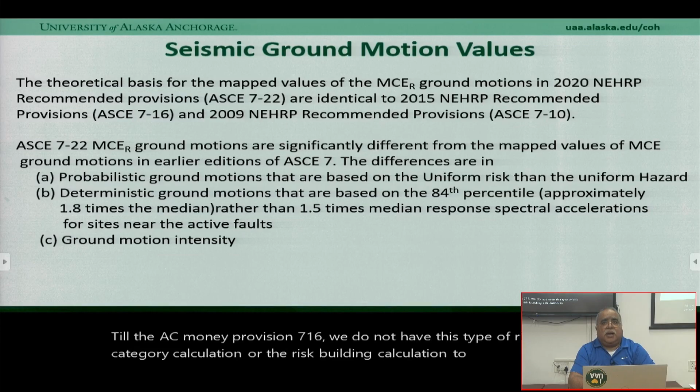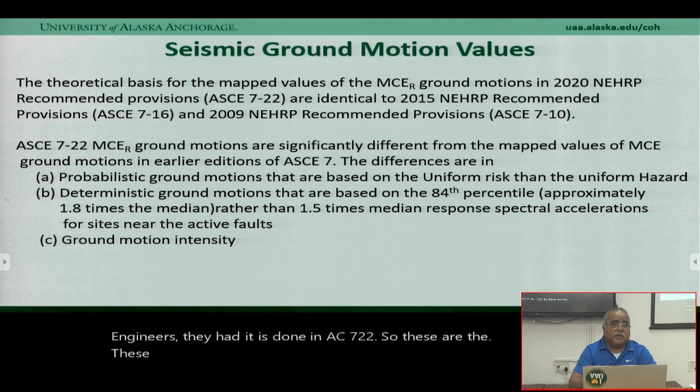So till 2000, till ASCE provision 7-16, we did not have this type of risk category calculation or risk building calculation incorporated. But in the recent change of the American Society of Civil Engineers, it is done in ASCE 7-22. So this risk factor has basically been introduced, and as a result, changes are being made in how to calculate the design.

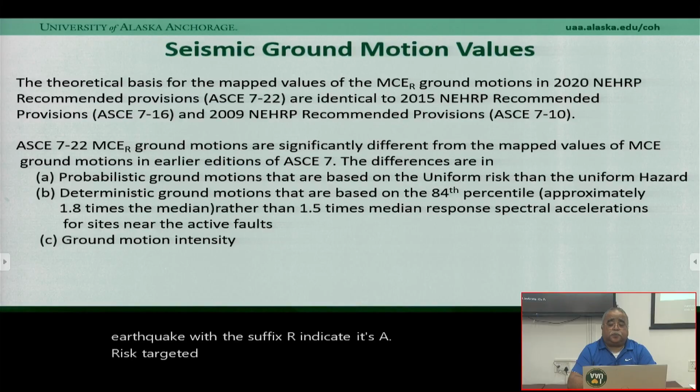So now we are giving a category which is called ASCE 7-22 MCE-R. This is your risk-targeted maximum considered earthquake. MCE is maximum considered earthquake, with the suffix R indicating it's a risk-targeted mapping. Earlier we did not have this, but currently it has been introduced.

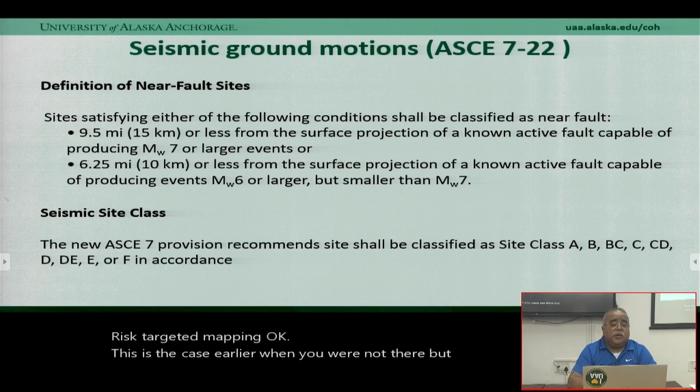Let me go to this. As I mentioned last time, when Professor Agarwal was showing all the site classes, the earlier site classes were A, B, C, D, and E. Now ASCE 7-22 has recognized a few other seismic site classes.

So basically, hard rock is now site class A, having a velocity greater than 1500 meters per second -- that means the VS30, or the average 30 meter shear wave velocity, is greater than 1500 meters per second. Then there is medium hard rock, geologically called medium hard rock, which is 900 to 1500 meters per second. That's site class B.

Then we call it the BC boundary, or BC site class. The BC site class is basically between 640 meters per second to 900 meters per second. That's the BC category.

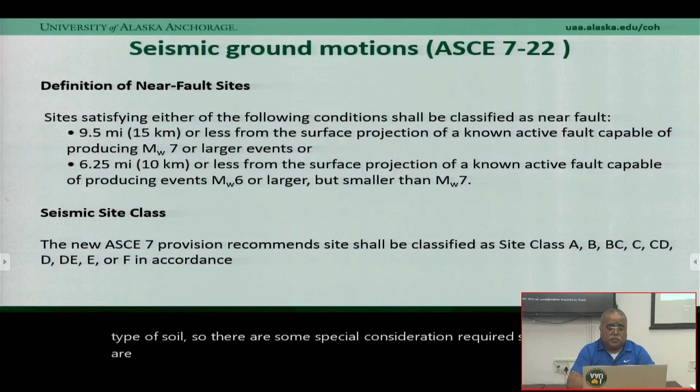So these are the soil types, whatever the current rules are. So now the seismic site classes are not just A, B, C, D, E.

It is all A, B, BC, C, CD, D, DE, E, and F, right? So these are the site class categories nowadays, and mostly the code will go up to D and E. For E, if that type of soil is encountered, meaning the average 30 meter shear velocity is less than 150 meters per second, they need to recommend putting the design very carefully. So for E and F, we have to be careful, but for the rest, we have some design criteria we can use for the seismic design part.

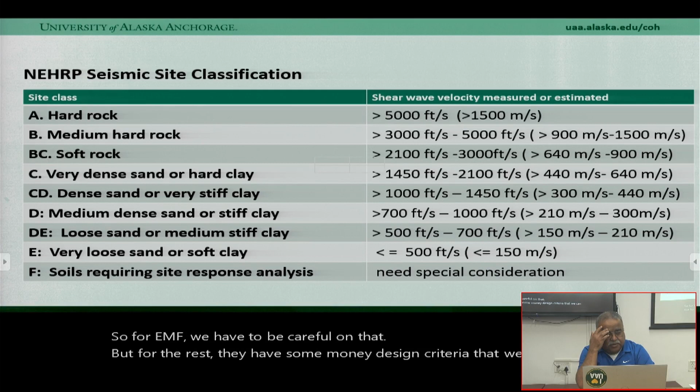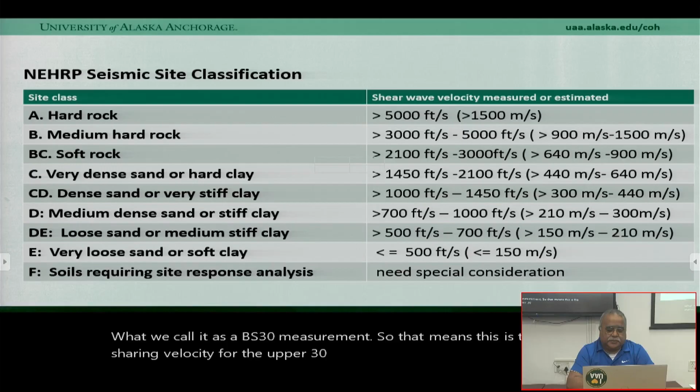Okay, now this is all what we call the VS30 measurement. That means this is the shear wave velocity for the upper 30-meter shear wave velocity.

Average shear wave velocity, what we call VS30, is basically the summation of DI divided by summation of DI by VSI. So if you have soil, and we are just trying to calculate 30 meters, let us assume there are a few soil layers. We add up the individual soil layers, and if it is 30 meters, we go only up to 30 meters. So the summation of DI will equal 30 meters, and then divided by individual layer thickness divided by its velocity, and goes up to 30 meters.

If the 30 meter mark falls within one boundary, we have to take that much of thickness which covers the 30 meters. After that, we should not take more. So that is your average 30 meter shear wave velocity. But does it make sense to you guys? If not, let me explain it a little bit.

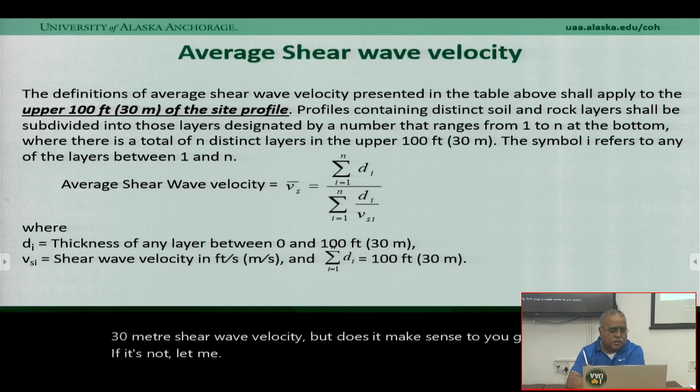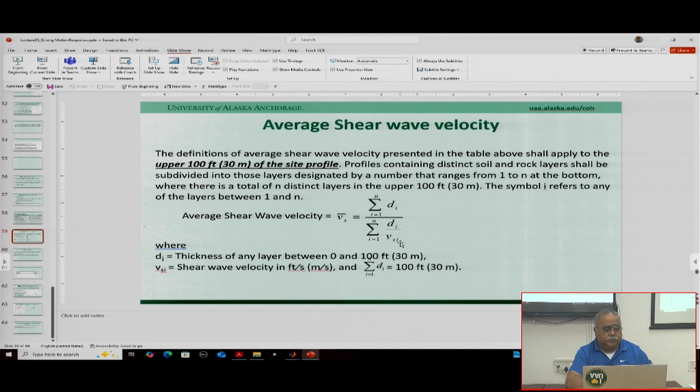Summation of DI by VSI - why are we taking that? Because this is velocity, and velocity means distance over time, so this is the time factor. Time means D by V. Because this is the total distance D, and this has to have the dimension of time. So D by time has to be the velocity. So if this is your time, then this has to be D by V. I sometimes get confused by this too, but thank you, I have not done it wrong.

VS30 - we only go for 30 meters, 100 feet depth. That's the reason. Other than that, for VS30, we are taking only VS30.

As I told you yesterday, we are talking about VS30 because in California, as I said, the California data mostly influences every part of the world since they have a very good network and a collection of data for a long time. In California, it has been found that building shaking is mostly influenced by the uppermost 30 meters. Now, you can say why not 100 meters - there is apparently no reason, but since it has been found technically that in California the 30 meter shear wave velocity information is critical for the structure, that is why it has been included into the code. If someday it is found that some regions have evidence that 50 meters is a much more controllable factor, then maybe 50 meter shear wave velocity average may be introduced in the code, but till now it is all 30 meters.

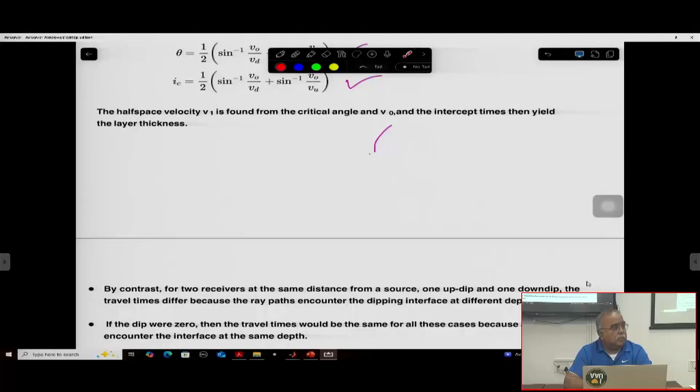Any site, even if it has topography - suppose this is the topographic profile, you have one site here and another site here. I always measure 30 meters from here, so that is 30 meters from this one, and I also measure 30 meters from here. Now whether the mean sea level is here or there, that's a different question.

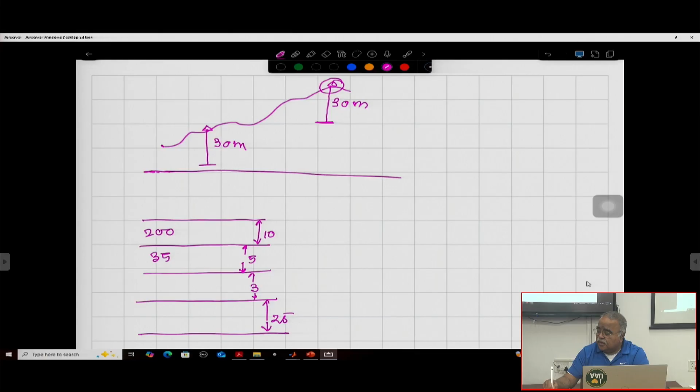Let's say this is 200 meters per second, this is your 350 meters per second, this is your 400 meters per second, and might be this is 600 meters per second. So these are all in meters.

If I try to calculate this value, the average VS30 will be equal to - this will be the 30 meters, that's for sure. So the upper one will be 30 meters, and then this will be d by v, so 10 by 200 plus 5 by 350 plus 3 by 400. This is 10 plus 5 plus 3, so 18.

Now this is 25, so I will not go to the full 25, but I will go to the 12 by 600. Then that will be the average velocity value - you calculate this and put in these numbers.

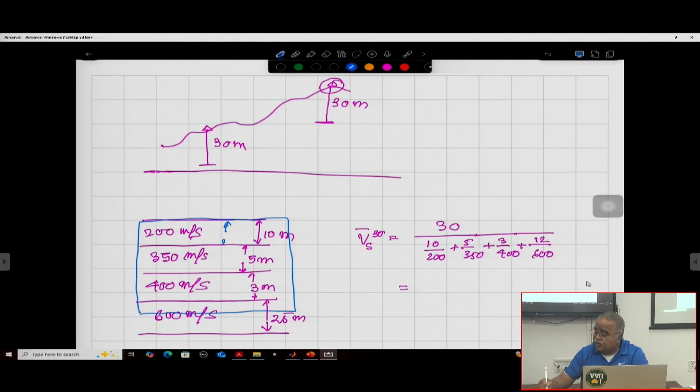That means we will be taking only up to the 12 meters from here, so that becomes 30 meters. So 12 plus 3 is 15, 15 plus 5 is 20, 20 plus 10 is 30. So that's how we use it in the VS30 calculation. Make sense?

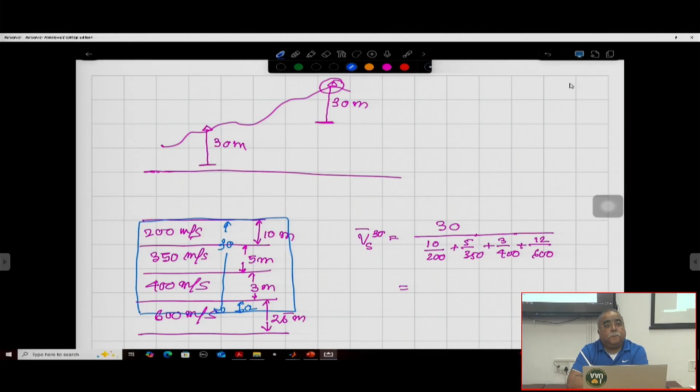Now let me tell you the main things. Earlier we had the MCE level of earthquake. This is before 2022. The design code has two things - one is the MCE level earthquake.

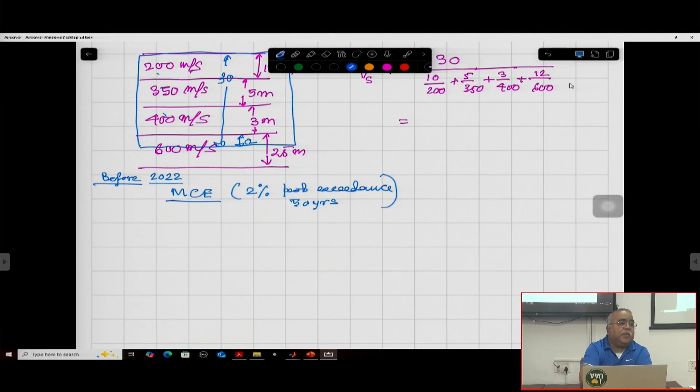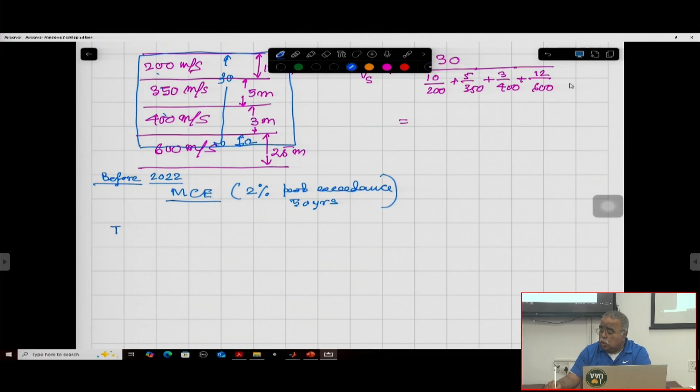Now, each one we were designing based on the two-point formula. We were using it. The two-point means in the map - in the map we were getting a short period spectral acceleration.

Short period spectral acceleration, we call it SS, so that's short period spectral acceleration. And we have another value, spectral acceleration at 1 second period, which equals S1. So these are the two period things.

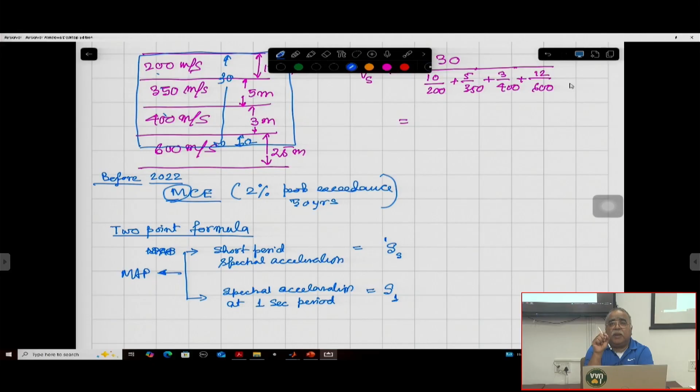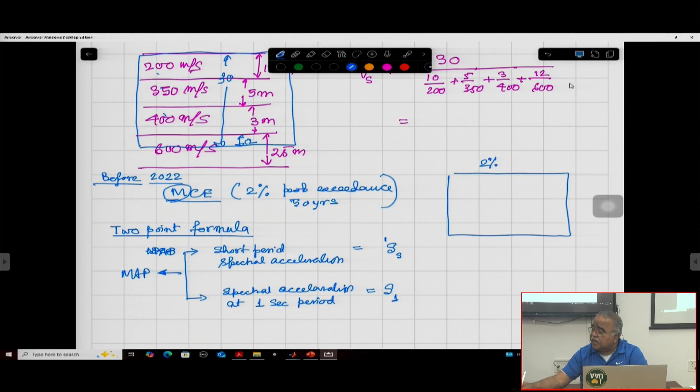Now these two numbers we read from the map, and these values are available from the 2% probability of exceedance in 50 years map. So suppose if you go to a place, you first take the spectral hazard map which specifies 2% probability of exceedance in 50 years.

This map has contour values at some point, and you have a site. So you read the site latitude and longitude. Say suppose this is your site, you read the values of the spectral acceleration map for this longitude and latitude. You can read, say, some numbers like 0.16 and 0.12.

So you can interpolate this and read these values for the short period map, that means at short period values. And also we have the same map available for the 1 second period, and from the contours you again read the contour values for the location where you are interested. That location gives you the S1 value, and this is your SS value.

S is actually the short period, the S means it's at 0.2 second. So there are two controlling points: one is the 1 second and the other is the 0.2 second. Right, so that's the 2 points.

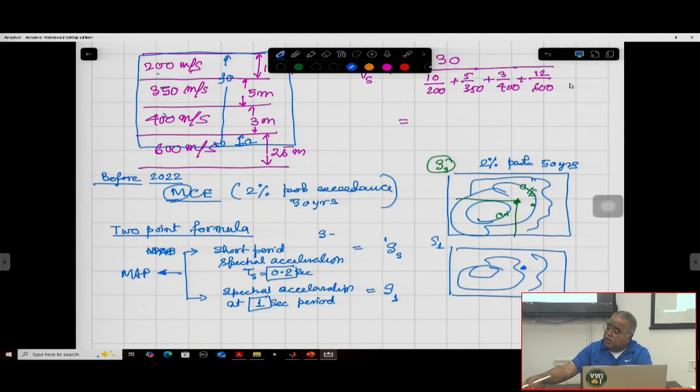Then if you have calculated the site class, now you see these maps are developed earlier, prior to 2022, and they are all given for site class B, because earlier we had only site class B as the rock. So these maps are developed for site class B, but you may have a site where you are trying to calculate the design that may have a site class, say C or D, but that will not reflect in these values, right?

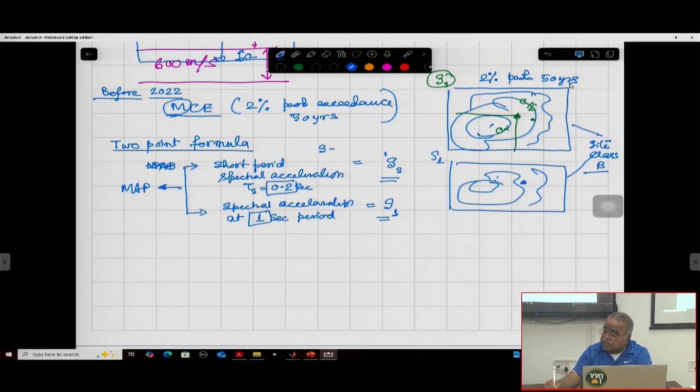So that is not given in that. At the time, only the map is available for the rock site, meaning the bottom of the engineering bedrock, that is site class B. So you have to correct for the site class.

So if you are using the 2% probability map, then SMS equals FA into SS, and SM1 equals FB into S1. So these FA and FB are the correction factors for the site class, which you can use for your maximum considered earthquake. You have a 2% probability of exceedance and calculate these numbers.

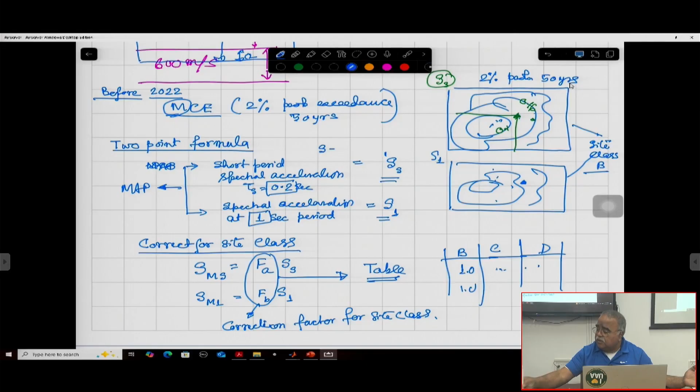So these things are given in the form of a table, the FA and FB values for other types of soil. So for type B soil, FA and FB are both 1.0, because this is actually given for the B soil class. Then C and D have different numbers. So that will be used - your SS value gets multiplied by this number, and that gives you the SMS and SM1 values.

One parameter is Vs. So the values what we are using for CD type, it is already included in Vs.

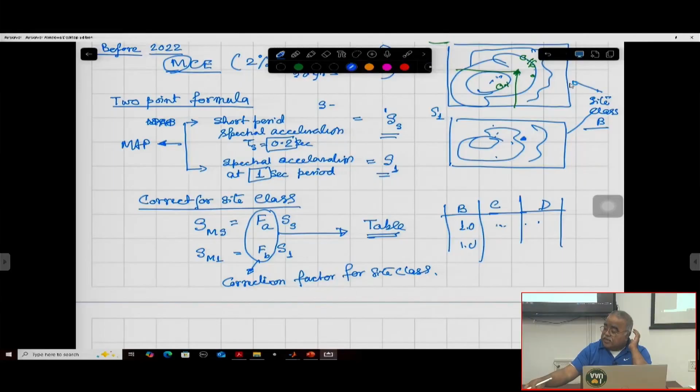When these maps are prepared, you need not think about the ground motion prediction equation. These maps were prepared based on the hazard calculation, so that means this has already taken care of all the hazard values, whatever in that area they like to do.

So whenever they did that calculation of the site response for the hazard, the hazard curve is like this, and there is a 1 second and a 0.2 second type, so this is 0.2 second and this is 1 second part, or might be anything like that. And this side is the rate of exceedance, and this is your rate of exceedance, and these are some numbers. This is the value of G, right?

So what we have done, we will be taking now the 2% probability of exceedance and calculate what will be G. So you have already calculated the 2% probability of exceedance, 0.0004 something, right? That's your probability of exceedance for 50 years, a 2% probability of exceedance in 50 years will be something around this. So you read this value, go through the hazard curve of that area, and then calculate this one.

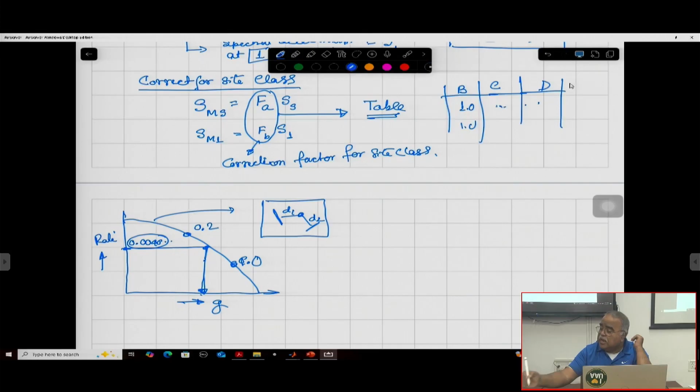And this hazard curve you have generated by seeing that this is your site, this is one fault, this might be another fault, this is your D1 distance, this is your D2 distance, and you have calculated this curve based on that. So if this curve was generated, then you calculate that if this is my rate of exceedance, then at that time what will be the value of G, and that value is basically written here.

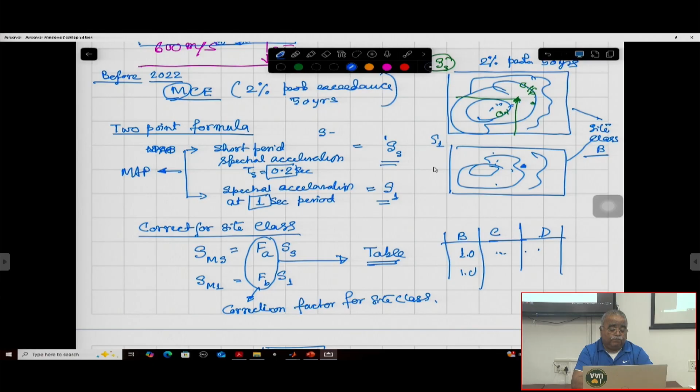Let me see this, there are the numbers. I have to see the numbers quickly.

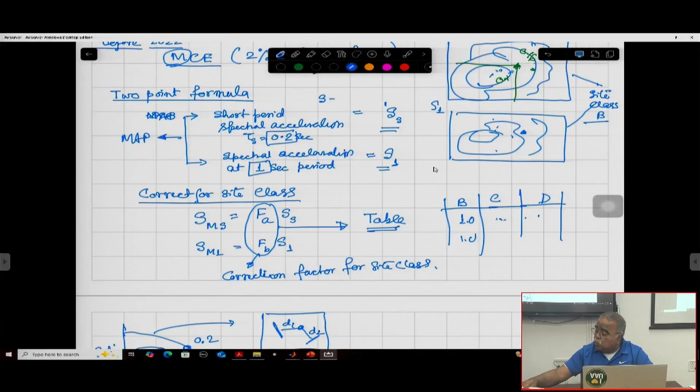After you calculate this SMS and SM1, we also calculate the T0. So this is your T0 values. T0 will be equals to SM1, whatever you have calculated SM1, divided by SMS.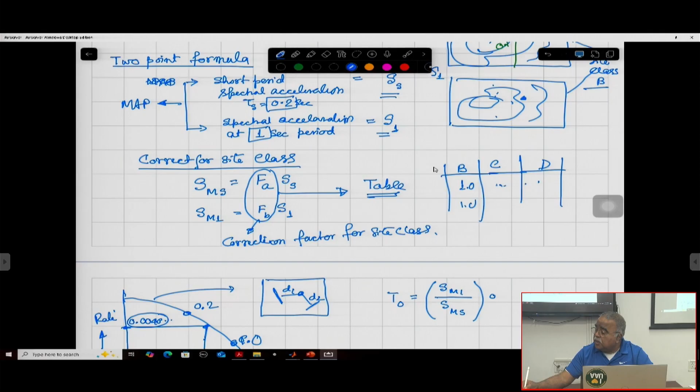So that ratio you calculate, and that will be calculated as this multiplied with 0.2, that will be equals to the T0. And this ratio we call it as TS. So TS into 0.2 will be equals to the T0 values.

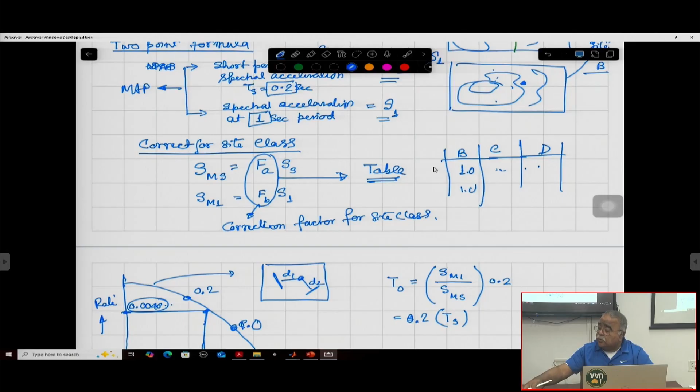So you can calculate with these numbers, right? So you know these values, and then what we will be doing here, we will try to calculate the spectral acceleration, this is the period, time period. So this is the period value and this is the S value, so this is the spectral acceleration at any thing.

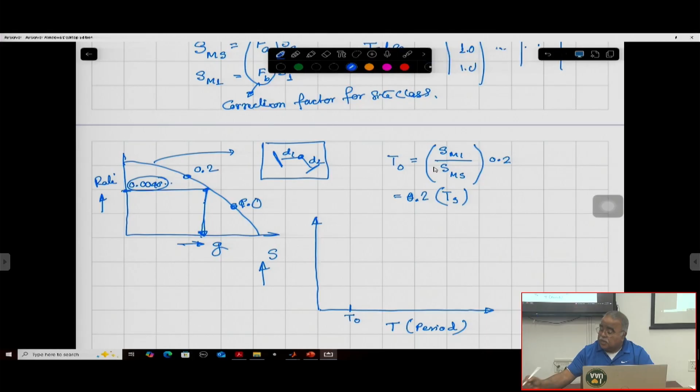So this is T0, and this is what SMS and SM1. So now we have got this T0 value, then we have to get this TS value. So we calculate, this is the TS value, and then we have 1 second, and then we have a TL value, so this is the TL. So these are the three parts that we need to use.

Now this is what I was trying to tell you earlier, that this is your FA and FB. These FA and FB are for different sites. So if your spectral acceleration, sorry, let's go to this side a little bit.

So if your spectral acceleration SS, whatever you read from the map, so you read the SS value from the map, right? And if your SS value from the map is, say, any value which is less than 0.25 G, or might be 0.5, might be 0.75, might be 1.0, might be greater than 1.5, then you also see your site class, because you have seen your site class. So from the site class you know whatever your site class is, it is your A, B, C, D, E. So let's say your site class is C, and you have seen your spectral acceleration SS value, which you read from the map, is say around, or it is say greater than 1.5.

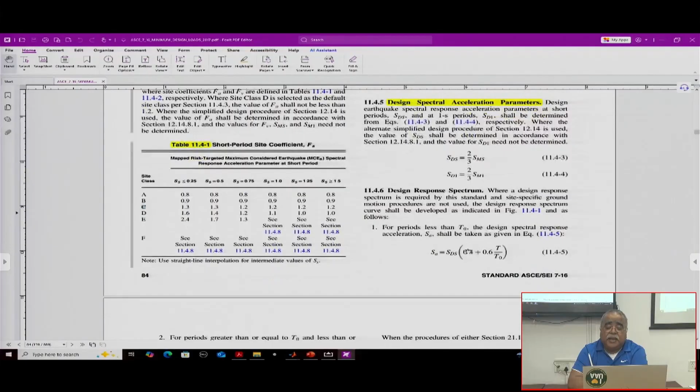Is it clear? So that is how you calculate your SMS. After you do that, you can also calculate SM1, and this one.

Now you take our design spectra, which is called the design level, and this is called SDS, SD1. So this is your MCE spectra, and this is your design spectra. This is what we call design spectra. This is a little bit less than your SMS and SM1.

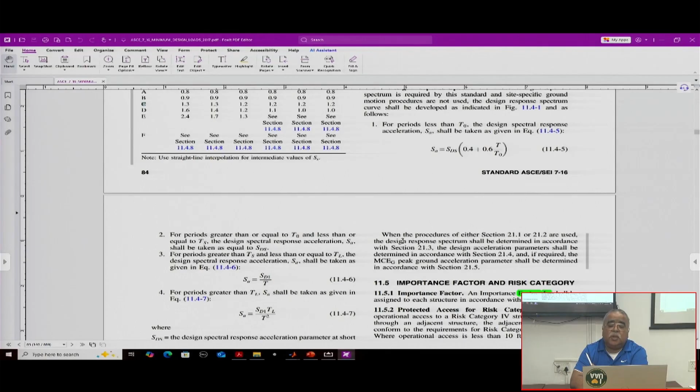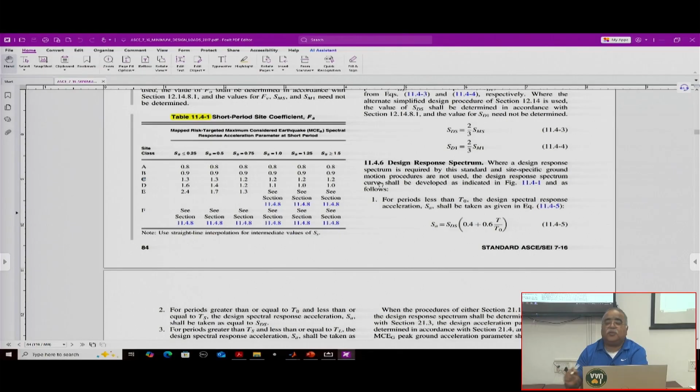This is your 2/3 of SMS. So you can see here, 2/3. This is your 2/3 of SMS, and this is your 2/3 of SM1. Right, so these are the design levels.

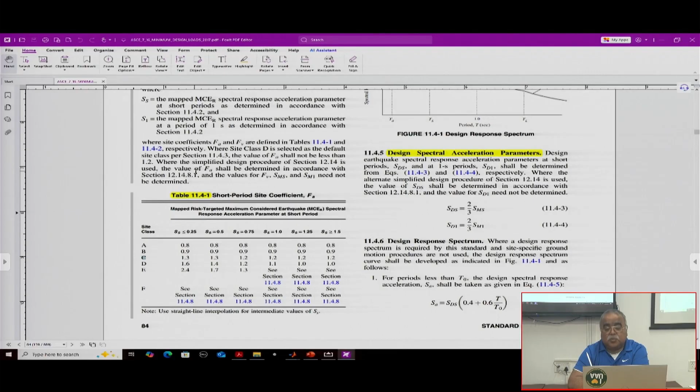Whenever you design the code, the design code will take the SDS value, unless you are doing a construction with 2% probability of exceedance type requirements, for example hospitals and other things. Then you can do it this way.

Now, the main equation for calculating SA in between the other numbers. So you have already calculated T0, TS, and TL, right? So this spectral acceleration SA, or you can call it A, will be equal to your SDS value multiplied by...

0.4 plus 0.6 times T by T0. So you know that T0 value, you already know your T0 value.

So at T equals 0, if T is 0, then SDS multiplied by 0.4 equals your SA. So this will be 0.4 SDS.

Whatever your SDS value comes out, you draw it here, and this equation is a straight line equation. So you can go up to this much, this line, and you just draw it this way. So that means this is your SDS level, and you just draw this line.

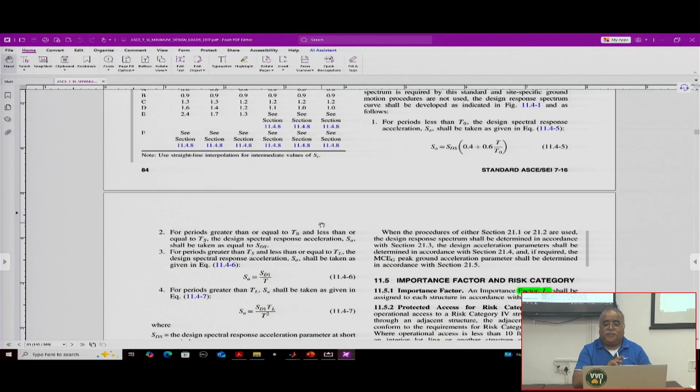Graph is not showing, sorry. Okay, let me show you this graph here. So it will be going to the SDS level, and this is your SDS point.

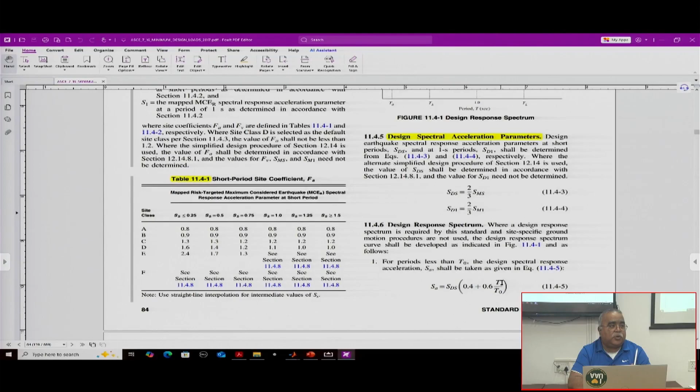This is the equation, so SA will equal 0.4 SDS, right? If T equals 0, if I put T equals 0, that means at the T equals 0 value, this point will be equal to 0.4 of SDS. Is it not? Is it clear? So that is 0.4 of SDS because T equals 0.

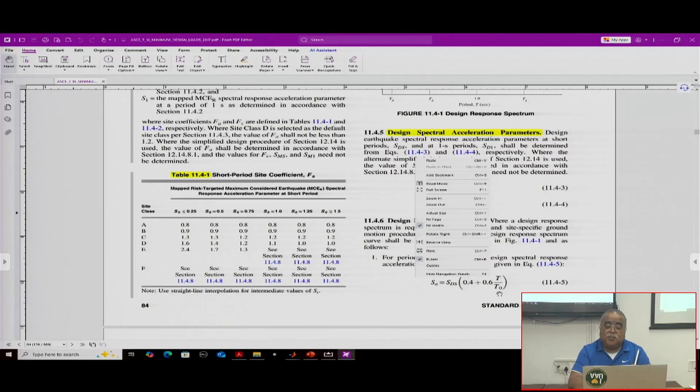And between 0 and T0, this equation is a straight line, right? This is a straight line equation, so it will go up to this much. It will go from 0.4, this point, to SDS by a straight line joining this one. And then this is your SDS value.

That is what I had already plotted. And it will continue as a straight line until your TS, and TS I had already calculated as SM1 by SMS value, that I have already calculated.

That will be the same as SD1 divided by SDS, because these are divided by the same thing. So if you can divide it, it will be the same number, so that doesn't matter.

It will go up to SDS, all the values straight line. After that, I also plot the SD1 value, which we got here. Just draw the straight line from the SD1 value, whatever you got, and this is the point at 1.0. So pull this point, and now I need to draw this curve.

This will be equal to SD1 divided by T, from TS to 1.0. At T equals 1.0, SA will be equal to SD1. So when T equals 1, it's this value, but when T is less than TS, it will be equal to SDS.

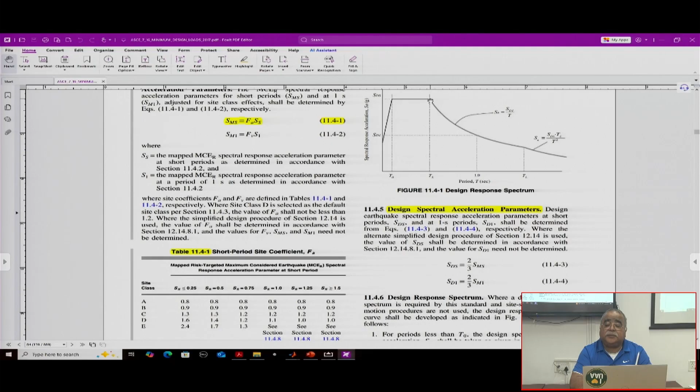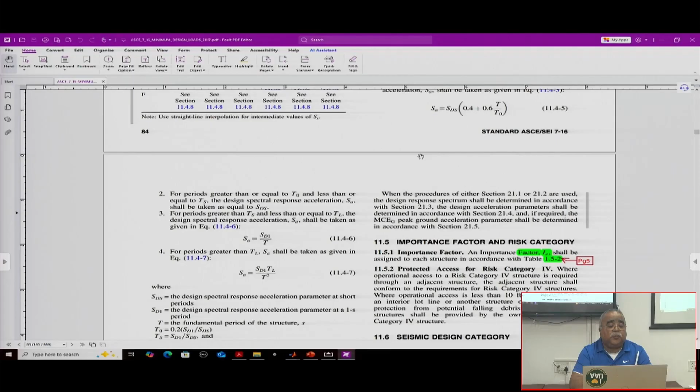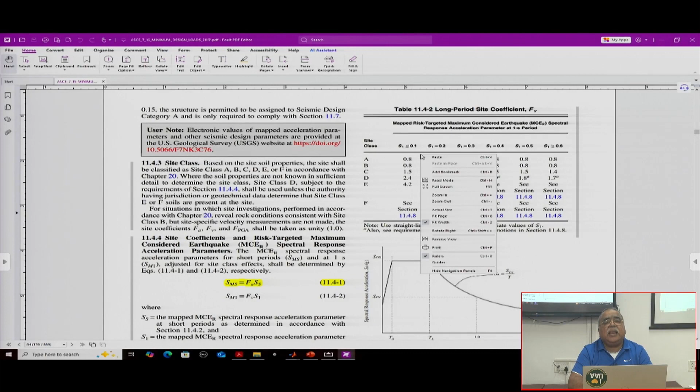So these are the two values, and the last value we need to calculate is the TL value. TL we also calculate from the map, which gives you the long period. There is a map which gives you the TL values. From that particular site, you also read that TL value number. TL is the long period number, and that will also be provided to you from the map.

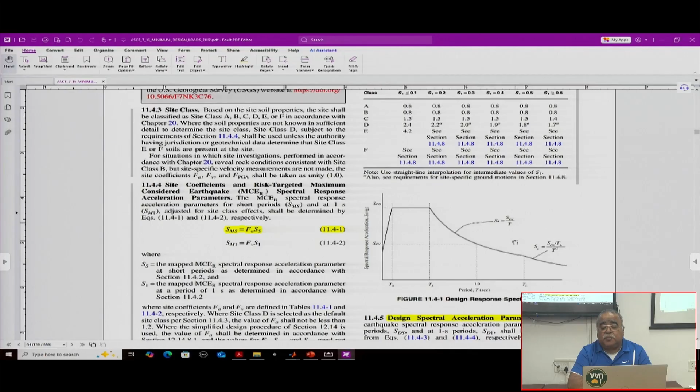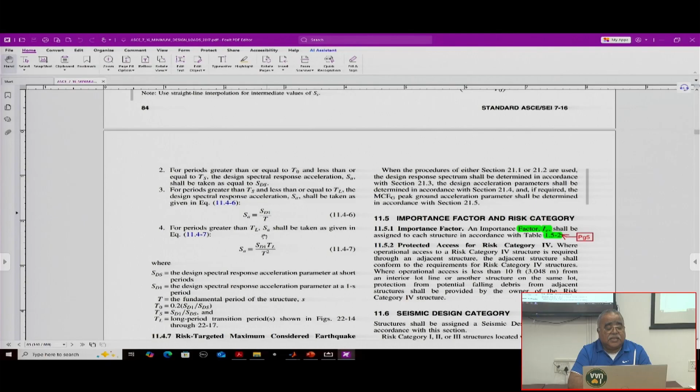So you take the TL from the map and put this vertical line, then continue this because it's the same equation from TS to TL, and that equation will be all the same type from TS to TL.

It will all be SD1 by T. Beyond TL, SA will be equal to SD1 times TL divided by T squared. TL you've already read from the map, and T is the time period, whatever value you put in. So put these things and calculate SD1 TL by T squared.

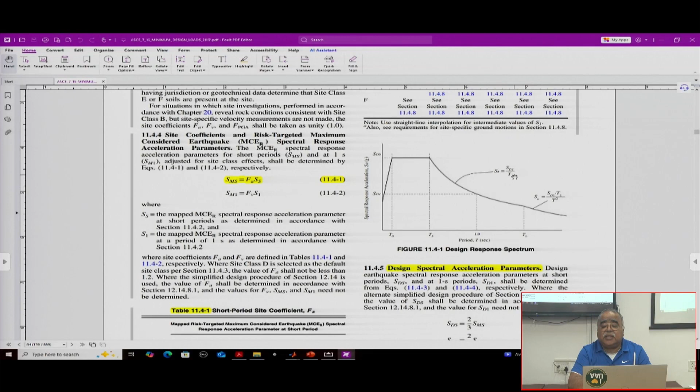So you have three lines: one is a straight line equal to 0.4, that formula, 0.4 plus 0.6 T over T0. Then there's one formula from here up to TL, equal to SD1 by T, and then beyond TL it equals SD1 TL by T squared. TL value you read from the graph, SDS value you read from the graph. SDS you convert, and SD1 you also convert, and you can follow these things to draw the design spectra of that particular place.

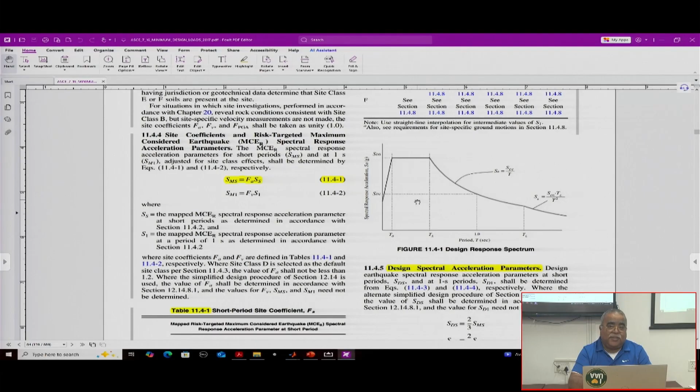If you try to design a building, that building should have a design spectra like this. So we construct this design spectra, and you can give it to the engineers, and they can put these things to use. Now, next, if I can do this...

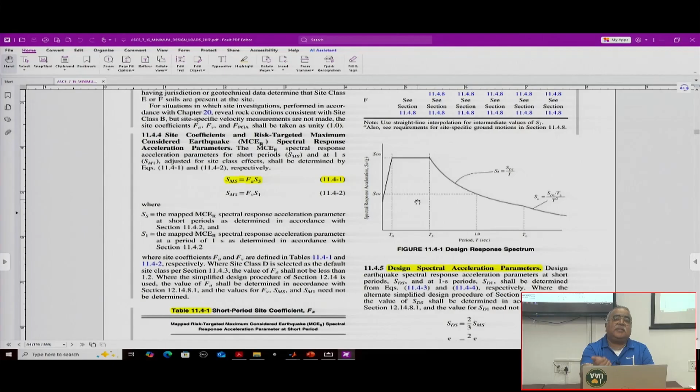We will be doing it this way: if I know the design spectra, that means that is your hazard-specified design spectra at that site. Then we need to generate your time history, which will basically follow this design spectra, and that time history we need to generate at the surface.

This is a synthetic time history, but whenever an engineer needs to design, his design will be checked based on the time history he has. So this is the design spectra, and our time history has to be compatible with this design spectra. That's what we need to design.

So this is our old model, just only this one. But if we try to do a little bit of modification, what are the modifications we have done? Thank you very much.